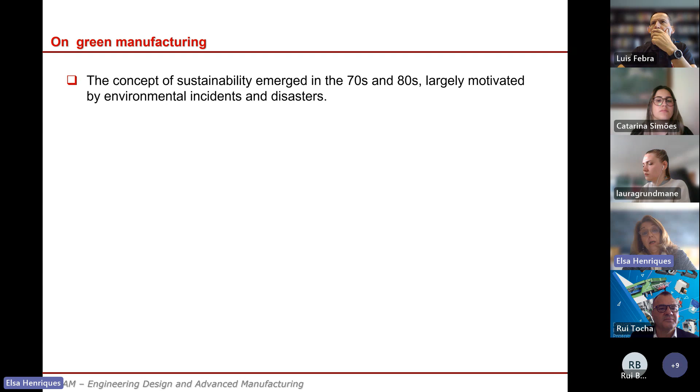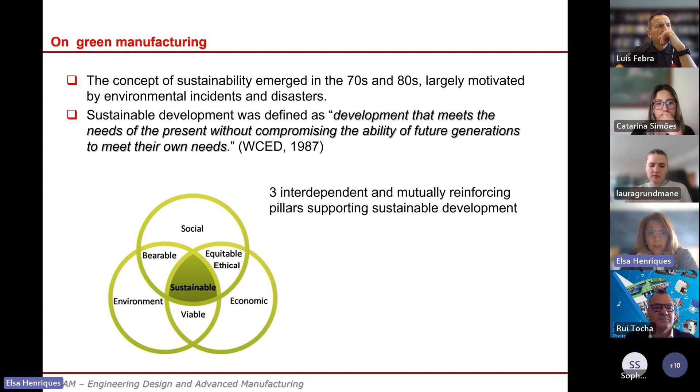On green manufacturing, most of us believe that the concept of sustainability is new. It's not so new, because it emerged in the 70s and 80s, so we are talking about 50 years old, and it was largely motivated by environmental incidents and disasters associated with manufacturing and industry. In 1987, the United Nations defined sustainable development as development that meets the needs of the present without compromising the ability of future generations to meet their own needs. Even if it's an old definition, it is still quite actual, quite updated. Sustainability involves three interdependent and mutually reinforcing pillars that support sustainable development.

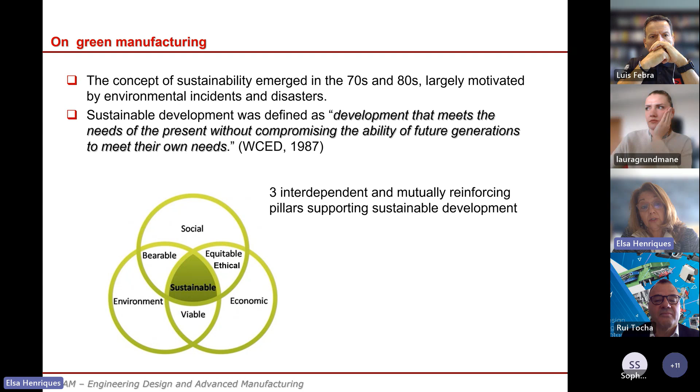You are talking about economics - it's not possible to think about sustainability without thinking about economic viability. But if you look at the other pillars, there's the environment, which means it needs to be bearable, and the social pillar, meaning our sustainable developments need to be equitable and ethical. So you are merging not only the economic dimension, which industry knows quite well, but also the social and environmental dimensions. Okay, so, manufacturing...

Manufacturing has a significant influence on global development and global growth. We cannot think of development without thinking of manufacturing, and that trend is likely to continue due to increased demand for consumer goods from a growing world and from our expectations of improving the quality of life. Manufacturing plays a critical role within our modern socio-economical systems, and for sure is going to be a contributor to that sustainable development.

In more recent years, Europe has assumed that reindustrialization is a way to keep and extend its competitiveness. Why is that? Industry is critical to ensure a balanced labor market and skills pyramid. In fact, in manufacturing, the percentage of skilled jobs and well-paid jobs, I would say, is higher in industry than in services, even if most of us believe the other way around, but it's not.

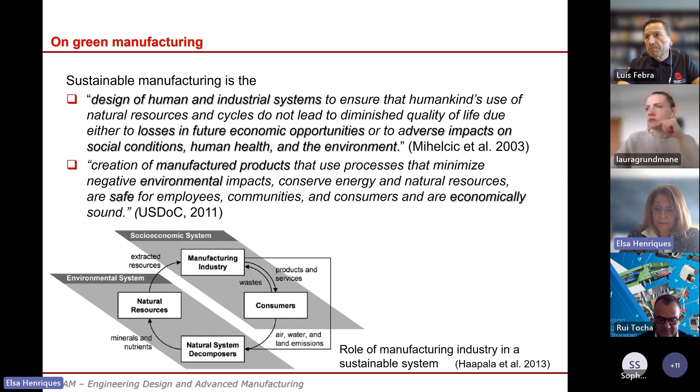What you can say today is that public policy is pushing for sustainable manufacturing, because manufacturing is at the core of the development of any region, and because sustainability is a must.

So the European Commission legislative proposal, I'm sure, will soon require companies to monitor their environmental impact. The Green Deal initiative to combat climate change and environmental impact is saying that it's necessary to reduce greenhouse gases by 55% compared to 1990, and improve energy efficiency by more than 32%. So something needs to be done.

And that something that needs to be done is, for sure, companies are going to face regulations, standards, mandatory rules that are going to push them to monitor what their environmental impact is.

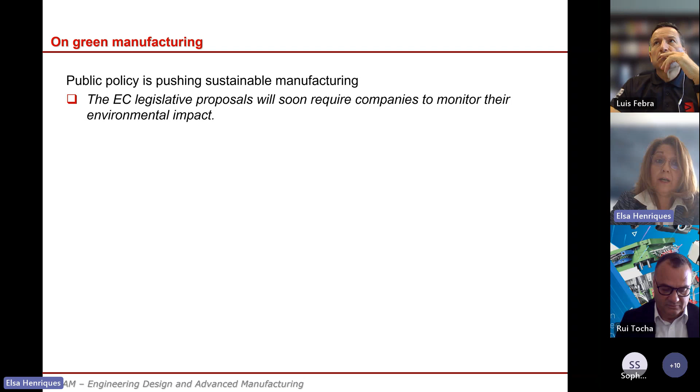And we can say, okay, maybe that's for big companies, not for small companies. Maybe you are right, maybe that is going to begin with the big companies, but because the industry is a complex supply chain, when at the end the big companies, the integrators, the ones dealing with the market directly with complex products, are going to be pushed to monitor their environmental impact, for sure they are going to push those rules to their suppliers, whatever they are.

Larger or small. So I believe this will lead to companies being taxed on their carbon footprint. And we are not talking about 20 years from now, or even 10 years from now. I think that to achieve the 2030 targets, and 2030 is 7 years from now, the only way to do that is, in fact, to come up with new regulation, new legislative proposals that at the level of states are going to be translated into laws, I would say.

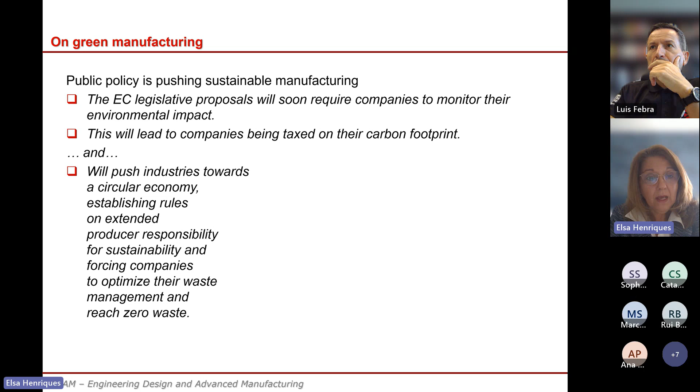This will push industries towards a circular economy, establishing rules on extended producer responsibility for sustainability, and forcing companies to optimize their waste management and reach zero waste.

And of course, it's not only a question of one company to reach zero waste. We are talking about all the supply chain of complex or simple products, all the companies achieving in the extended value chain of the final products to arrive to that circularity and to reach zero waste. Of course, the European Green Deal is going to push for that.

Of course, we know that now we have a war, that all the geopolitics are changing, and for sure the focus of our public policy - maybe those issues are not in the front page of the newspapers - but in fact, that's not something that you can delay much more.

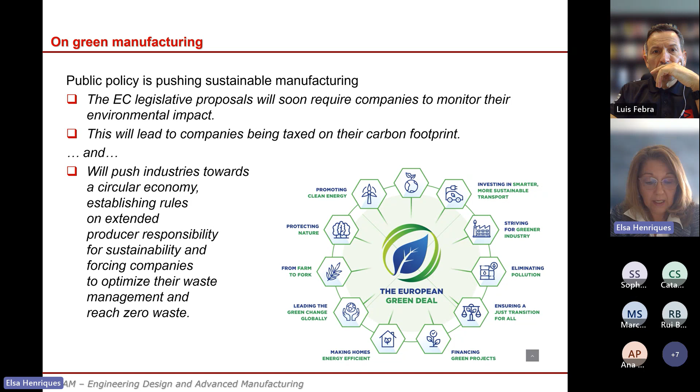Okay, what is the problem there? I don't know if it's a problem. It's a framework. It's a challenge. It's something that...

Companies - and I believe pushed by public policy, and pushed by the pressures and constraints introduced by the clients, whatever the clients, if clients are final customers in a consumer market, or if the clients are business companies in a business to business context - in fact, that's something that every company, from the small one to the big one, from the ones that produce simple products to the ones responsible for large and complex products...

In fact, green manufacturing is something that is there. And my question is how to approach such a difficult problem inside a manufacturing business operation.

And my proposal, or what I would like to present here, is that we can learn from yesterday. We can live for today and hope for tomorrow. The important thing is not to stop questioning. That's a sentence, a quotation, a quote from Albert Einstein.

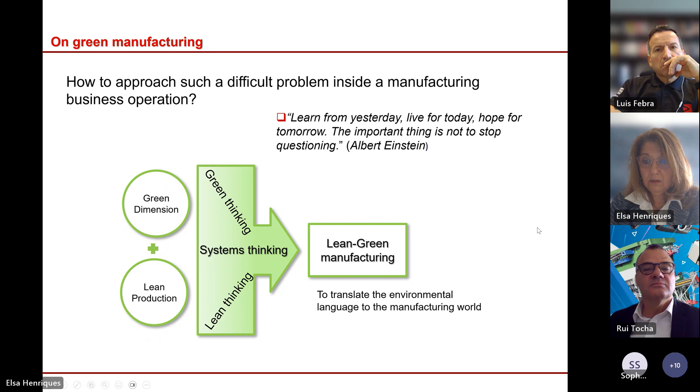So that's my basic framework: introduce the green dimension on lean production, and some definitions or some discussions.

System thinking is something that, considering a complex system, the system is more than the sum of the subsystems and components. So the components of a system only can be understood in the context of the relationships that any component has with other systems, subsystems, the environment, I would say.

So manufacturing is the constant game of doing more with less. Therefore, manufacturing managers are always looking for new ways to increase efficiency. And to increase efficiency, we only can do so if I consider the whole system altogether. It's not sufficient to increase efficiency in one work cell, one machine tool, one department, because most of the times I'm improving locally, but I don't know what is the result in terms of the whole system.

And that's the approach that lean thinking comes up with. And it's not new, lean thinking, okay? So I consider that lean thinking is something that exists and is well assimilated by companies right now.

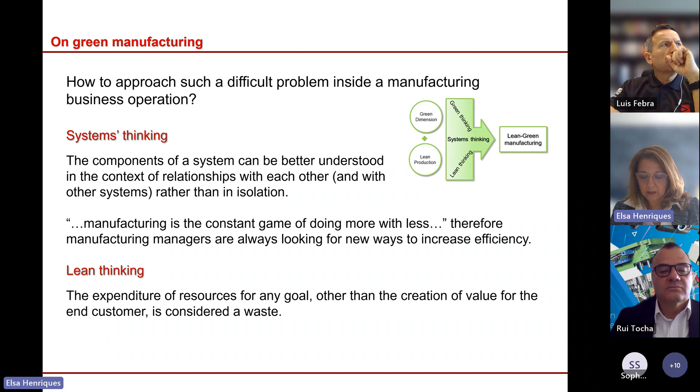And that's the basic thing. The logic of lean thinking can be redesigned and integrated to the sustainability systemic concept.

If the objective of lean thinking is minimizing the waste produced in manufacturing, and that waste is a good thing—if I can identify that waste, if I can minimize it, if I can eliminate it—theoretically, at least, I'm going to arrive to cost savings doing the same, creating the same value. In fact, the waste costs money, so if I'm eliminating the waste doing the same, I'm going to arrive to cost savings. But shall I arrive to a reduction of the environmental impacts?

Because if I'm using less resources to do the same, theoretically, at least I'm going to arrive to reduced environmental impacts. So integrating lean thinking and the green dimension offers the foundation for a new business logic, where the pillars of sustainability can be better understood by manufacturing and better support the business goals.

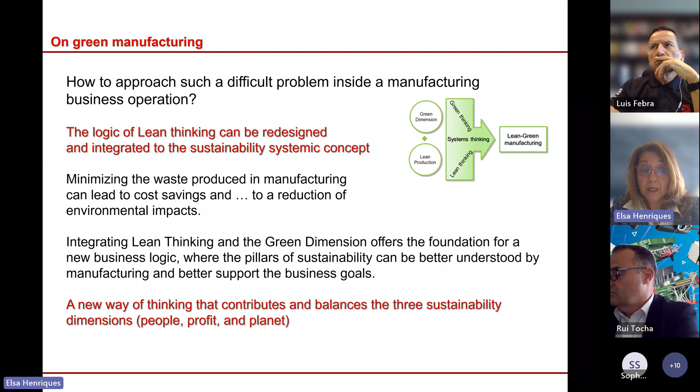And it's a new way of thinking that can contribute to balance the 3 sustainability dimensions: the 3P, people, profit, and planet. So what I'm saying is that green thinking deals with the environmental dimension.

Also reducing the wastes, but new wastes. Those are not the same, because I'm producing with the maximum productivity in the use of natural resources. So I'm going to use natural resources, but with the maximum productivity of those resources, and producing to minimize the environmental impact.

And there are many green practices: eco-design, design for environment, life cycle analysis, cleaner production, environmental management systems, environmental performance evaluation. Those are instruments out there to evaluate, measure, and reduce environmental impacts—some with a focus on design, some with a focus on manufacturing, some with a focus on evaluating life cycle analysis, evaluating the result, how much impact am I going to have, and some dedicated to regulations.

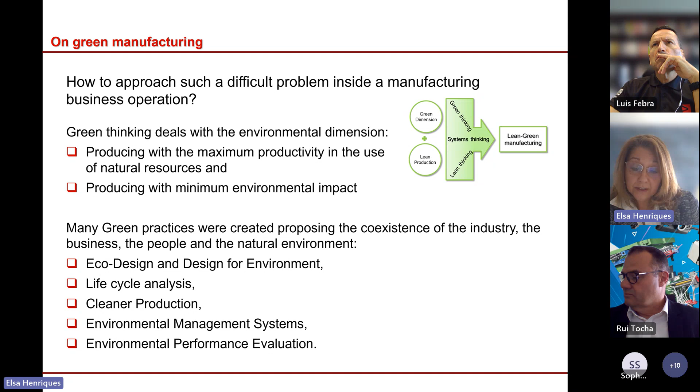And organizational systems in place. I already said that waste has somehow different meanings, even if lean thinking and green thinking are both focused on reducing waste. Those are wastes with different meanings. Lean manufacturing perceives waste as non-value adding to the customer.

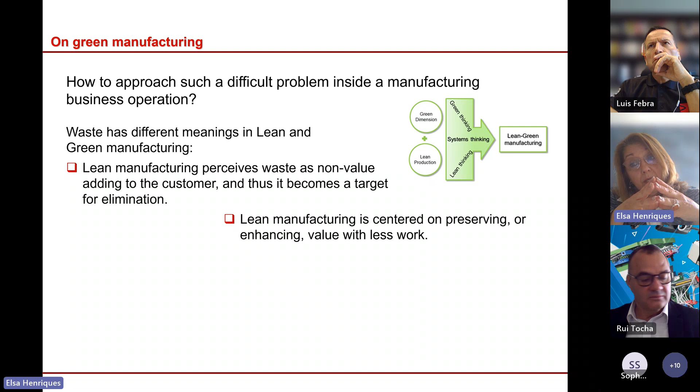If some time is waiting time, if overproduction is non-quality—those are things that are not adding value to the customer. Some of those may be necessary, but most of them are clearly a complete waste that can be eliminated from our manufacturing system without any impact on the final value delivered to the market or to the customer. So lean manufacturing is centered on preserving or enhancing value with less work.

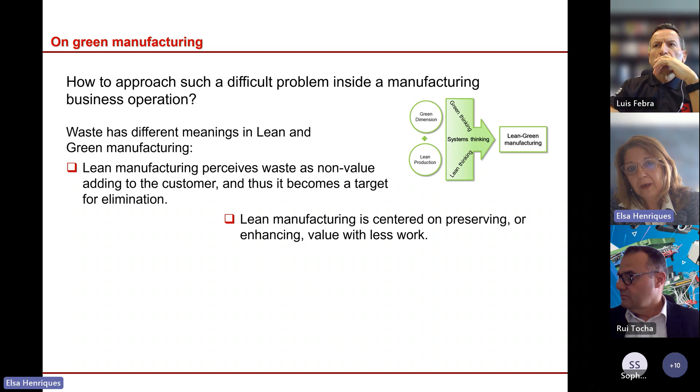So time here is very, very important. The waste is normally associated with waiting time, or the time it takes to produce a non-quality product, or things like that. But green manufacturing perceives waste as the extraction and disposal—inputs or outputs of resources—at rates beyond what nature can support.

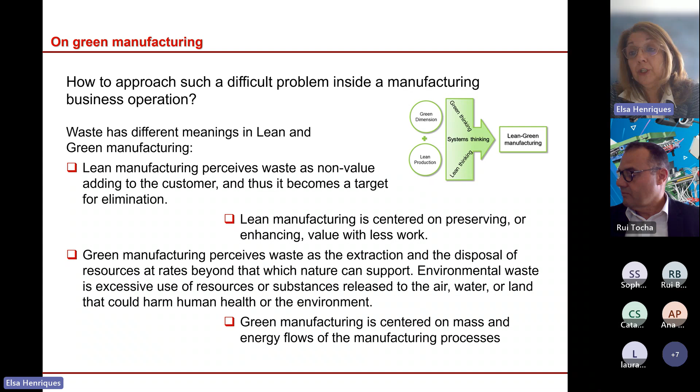Environmental waste is any excessive use of resources or substances released to the air, water, or land that could harm human health or the environment. And it's not only related to the company itself, but to the whole extended value chain, from my suppliers to my clients and to the end customer and the use phase of the products—because some of those substances released to the air are released in my manufacturing system, but maybe some of them are released only during the use phase of the product or at the end of life.

So lean green manufacturing presents its own purpose: produce exactly what the customer wants, exactly when, at a fair price, with minimum waste and environmental impact, and with the maximum productivity in the use of natural resources.

That's a definition. So the proposal here is to introduce the green dimension into the practices that we already have in place. And there is a process here that I can implement in any company—a process that is very similar to what happens in lean manufacturing practices, I would say.

So identify a stable value stream, identify the flow of value, the environmental aspects and impacts—not only the waiting time, not only the non-quality typical in the cycle time, not only the evolution in a timeline of value-adding and non-value-adding activities. So identify the flow of value, the environmental aspects and impacts, and measure those impacts.

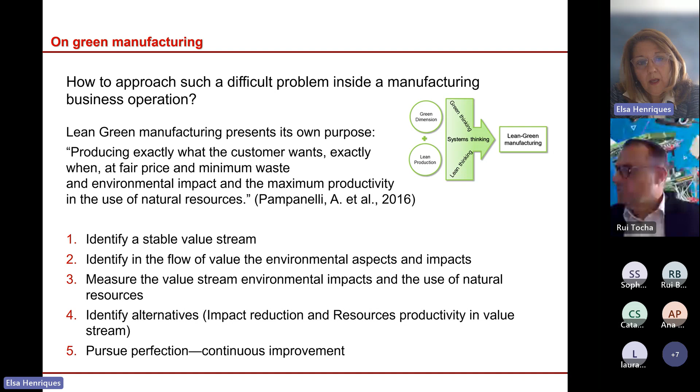Identify alternatives for impact reduction or for better productivity in the use of resources, and then continuous improvement—pursue perfection.

I have here only an example—a very simple example, but it's based on value stream mapping. Value stream mapping is a lean manufacturing technique, a tool—one of the 5 pillars of lean thinking. It's a tool that can be used to analyze and design the flow of materials and information required to bring the product or service to a customer or consumer. And here it's not a product—value stream mapping is nowadays a technique being used in manufacturing.

In manufacturing, this is a common technique with several adaptations, more complex or more simple, but it's there. And now it's being used also in services, in complex services like hospitals and things like that.

Value stream mapping is focused on the design of the flow of materials and information. The output is normally a timeline in which we can identify the lead time of the whole process, but also the different components of that lead time, step after step, with value-added parcels and non-value-added parcels. If I identify the non-value-added parcels of that time, those are elected to be mitigated, reduced, and even eliminated.

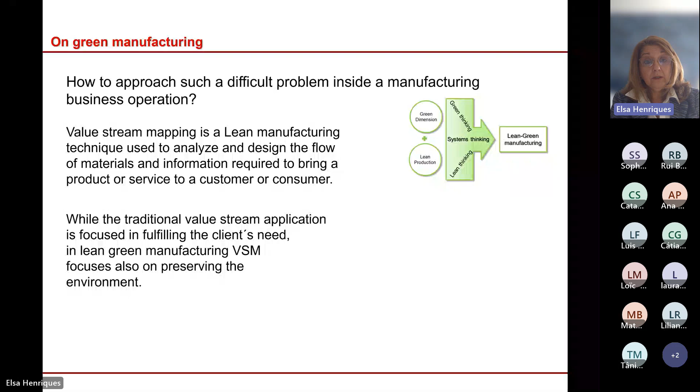But while the traditional value stream application is focused on fulfilling the client's needs, in green manufacturing, value stream mapping focuses on preserving the environment.

So here in the slide we have the focus on traditional lean, and on the right side the focus of value stream mapping with the green dimension. We are focused not only on the value stream, but also on the site and its surrounding impacts: air, soil, groundwater, flora, fauna, whatever. Emissions, consumption of resources, whatever they are, and the emissions - what happens to all those emissions that are outputs of my process and that are not considered in lean.

Then we are going to calculate the global environmental impact, the rate of using energy and raw materials, the rate for waste, environmental assimilation, and the identification of opportunities to recycle, to introduce the circular economy, to reduce, to whatever.

And for sure, here in green, it's not only about the customer and the creation of value to the customer as in traditional lean - in lean green we keep the customer for sure, we are not going to eliminate the customer, but we consider that you have another client, I would say. So the environment is the end customer, and the process is the traditional process.

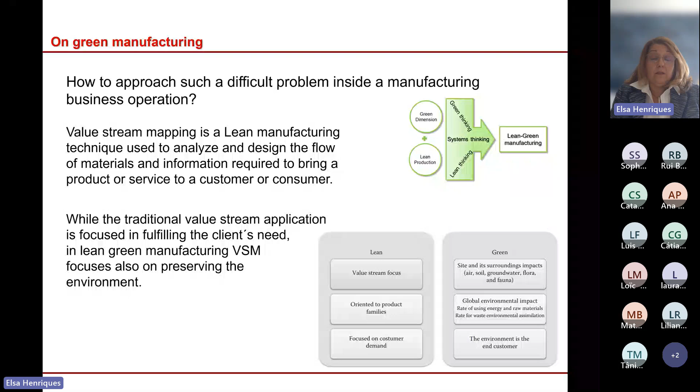So in the beginning, the first step is to create the current state value stream map with the lean green framework that should consider all inputs and outputs.

And those outputs are not only the final product, the thing that I'm going to sell and introduce in the market, but the outputs are also raw materials waste mass, consumable materials waste mass, hazardous materials waste mass, wastewater volume, amount of air pollution, and of course the waste mass is not only for one material, but for different materials, whatever they are.

And the inputs are the consumed water volumes, the energy, the raw materials, consumables, the hazardous materials. The inputs are more or less similar to what the lean approach already uses. In terms of outputs, we are talking about not only the final product, the thing that I consider valuable, but all the other outputs that come out from the system.

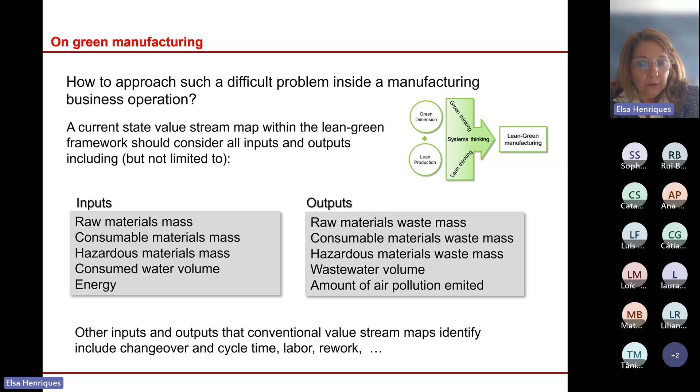And of course, when thinking of a value stream mapping based on lean green, all the other inputs and outputs that are conventional, that any conventional value stream map already uses - like changeover, cycle time, amount of labor, rework, waiting times, inventories - all of that is there and presented.

So just a very simple example to illustrate what I'm saying - imagine something that is a milling and washing process. Normally in a typical value stream mapping, the green line below the milling and washing process is a timeline in which the upper parts of the line are the added value time, and the bottom parts of the line are time in which there is waiting, no added value in the process.

And here it's the same, but one line of those exists for any resource that appears. So the top line is the amount of used resource, and the bottom line is the amount of needed resource. So here I only need a certain amount of water, but I'm using much more, and of course I can identify here a possibility to reduce that type of quantity.

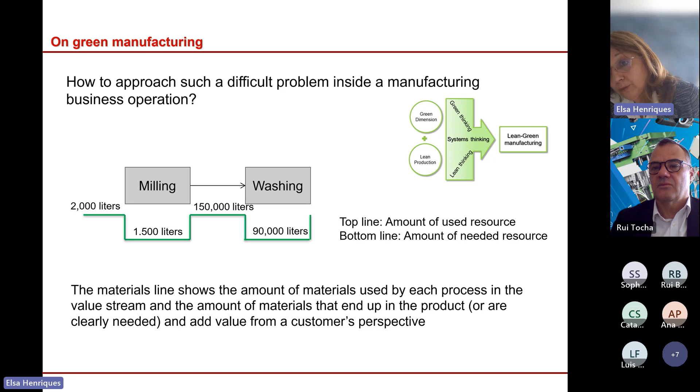Here is another example, also with washing, but here it's the parts washing and dust removal process, so with acid. I have here a classical process - that's the current state. And in green, I have the inputs of each process without quantities, but of course I need to introduce quantities here.

And with green, I have the outcomes, the outputs of any of those processes that needs a solution. I introduce fresh water in the acid wash dip tank, fresh water and acid, and the result is acidic wastewater. That acidic wastewater no longer can be released in the environment and needs some kind of treatment, and that costs money. And acid fumes, maybe that does not cost money yet, but I believe that sometime in the future they are going to cost money also, if not to treat, at least incorporated in the price of the acid.

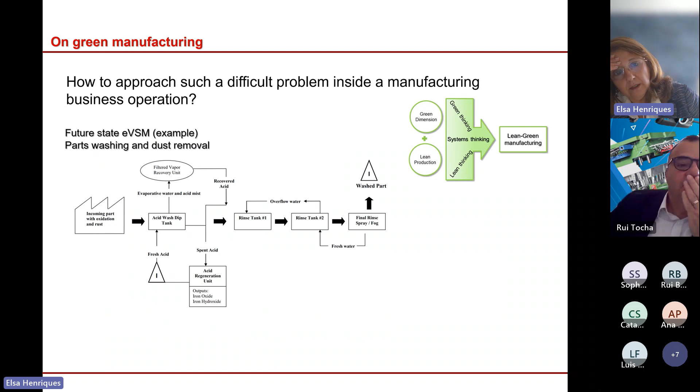So it should be a continuation of a continuous improvement culture, where lean culture is already in place. And for sure, it's very important in those examples. I only have here the identification of inputs and outputs, but of course, for a unit of product, it can be a batch, the production of a month, the production of a year, or a unit of a product. We need to quantify how much fresh water I need.

And because I have fresh water and acid, sometimes I have improvements or solutions that increase the amount of acid and reduce the amount of fresh water. So we need to compare, in terms of environmental impacts, those trade-offs. Most of the time it's not possible to reduce everything at the same place, at the same time. We reduce something, but we introduce another waste that was not present in the beginning. And because those are different materials, we don't know.

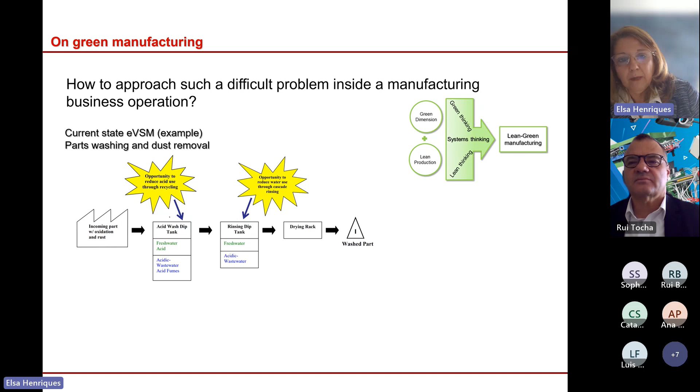So it's not a question of mass, it's a question of environmental impacts and of costs. It's important also the cost, I'm not saying costs are not important. But in terms of environmental impact, the only way to compare and analyze those trade-offs and the benefit I introduce is, of course, to do some kind of life cycle analysis, to convert and compare different materials into the same units, eco points, or CO2 equivalent, some kind of measure we can use to compare.

And last but not least, and maybe it's the most difficult, this is not something that can be introduced only in a company. So I'm saying that we need to use the extended company.

Because we need to use the extended company, suppliers and the clients, I strongly believe that sooner than later, even the SMEs and the smaller companies are going to be impacted by the new requirements that are going to be mandatory on green manufacturing. And it might be by law, or it can be by pressure from the clients and suppliers.

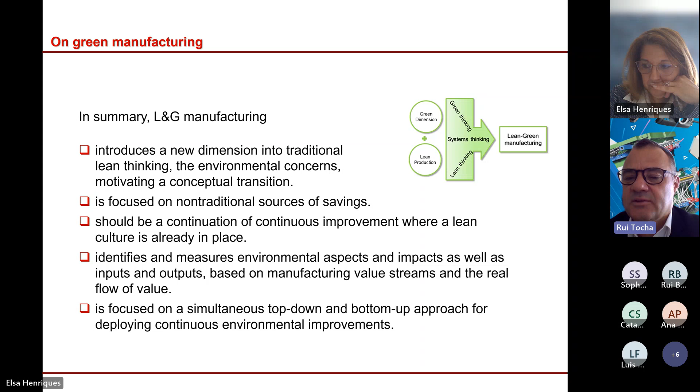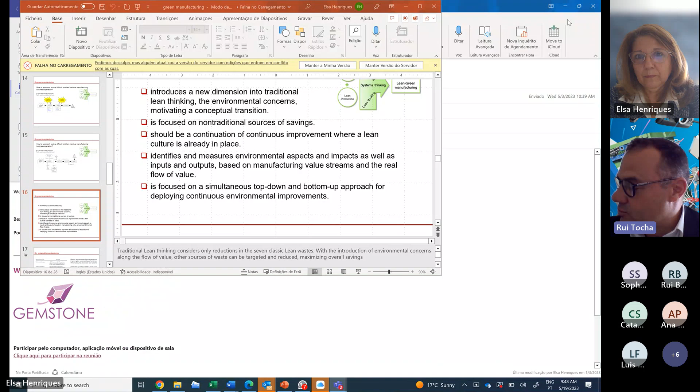The first question is always difficult. I have one. For you, Elsa, what are the major difficulties to implement green lean manufacturing, and how to make clients perceive that value? Because normally they are focused on prices. This is a very difficult question, I know, but for sure you have some reflection on that.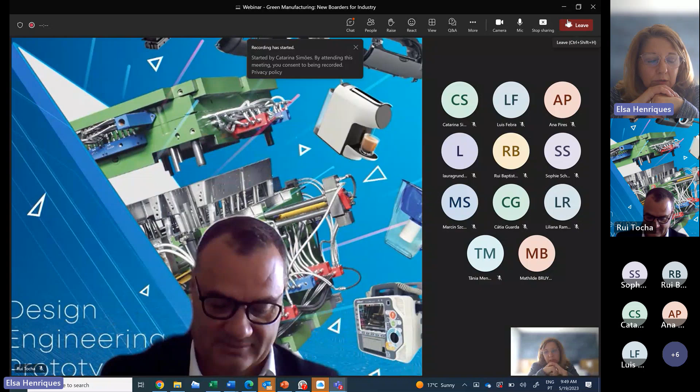Yeah, of course, it depends on the company and the power that the company has to deal with the other members on the supply chain and the value chain, the value network. What I'm saying here is that frequently we don't increase costs on that, because nowadays we already have to treat some of our wastes. It depends on the waste, but we need to treat some of it. So I don't see it as something that, to be done, increases costs.

And for sure, this is not something where we wake up one morning and change everything, and now we are going to be green, and all our wastes are going to be treated, and we are going to have all of our wastes in a circular process, recycle, reuse, whatever. This is not going to work like that. This is a process, but it's going to be a fast process.

And it's not only a question of any company passing that information and that increase of costs, if they exist, to the clients. It's something we need to be prepared for, because at a certain point, our clients, in a business-to-business context, are going to demand it. And even if not everything is in place, we should be prepared to answer in a very fast time frame. So I don't believe in revolutions.